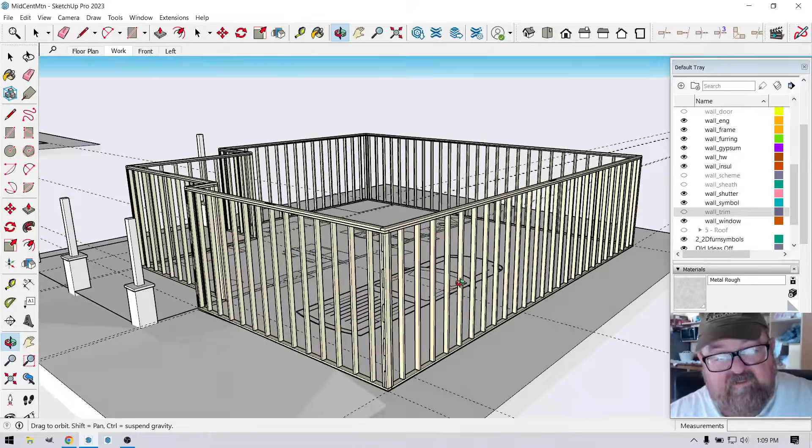This is my new tiny home. I'm going to replace my...

Let's just turn it back on. Turn all this back on. Well, let's go over here.

I'm getting ready to build my new little house, and this is fashioned after a mid-century modern house design that I love. The style I love. So let me turn all that back off. Let me get this.

Turn this stuff back off. Turn the roof off. Turn the sheathing off. Turn the cladding off. There we go, because what I want to do is just, and then turn the doors off. Turn the trim off. Alright, now we're cooking with gas.

What I was wanting to do is, I'm getting ready to build this thing, and I'm getting ready to pour the slab. In the next couple of weeks, actually, I need to get going on the material list for this thing. So the best way to do that is to just draw it.

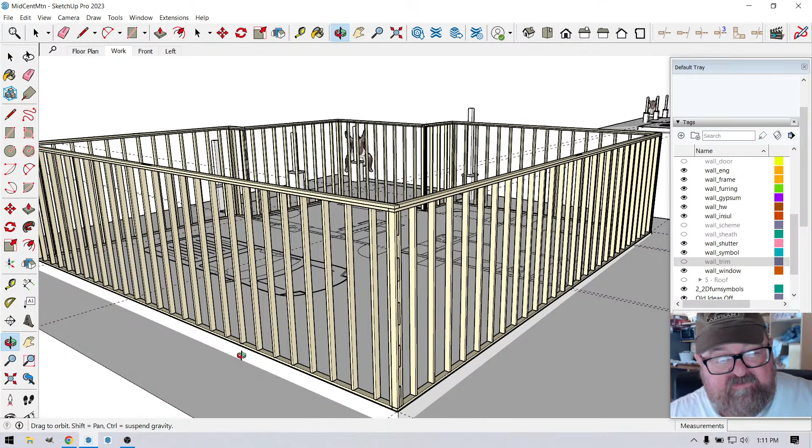Loud and clear now, great. Hey Gary, man, that's frustrating. I had so many wise things to say, and the sound was off.

I think I can convert this wall to a gable wall, a gable end wall. Let's see. Yeah, gable end, and what that allows you to do is put the pitch. Now, this is a mid-century modern cabin, so I've got to have a low pitch roof. So we'll just see what that looks like. That's a baby.

Is that the center? What is that? Oh, I see what happened. The one on the right was based on 109. Yeah, update.

What is going on? The dang skeeters are getting into my tiny cabin, and they're getting fried in the bug fryer. I've never had one last that long though.

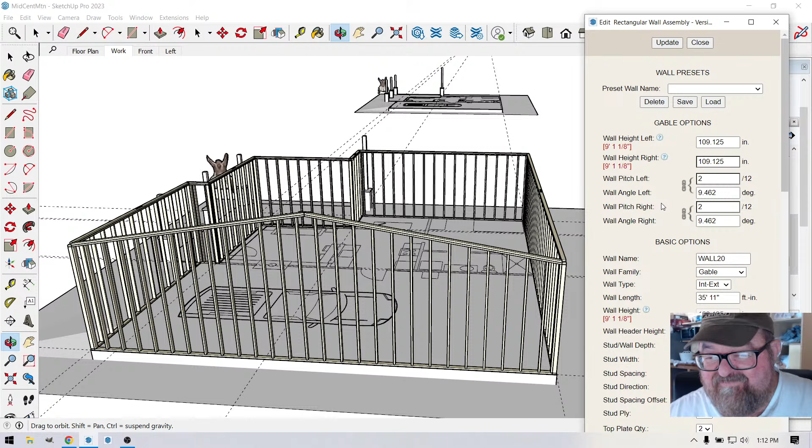It's kind of funny. Anyway, I wondered why the gable was not in the middle. What's that right there? Oh, that's the wall label. Let me turn these... ooh, it's starting to stink. Holy cow! Update. Let's close this for a second.

I want to turn these wall labels off. They kind of drive me crazy. But that's kind of handy, honestly, on this wall extension, to be able to convert the walls to a gable wall. Because you can see, if I turn on the roof...

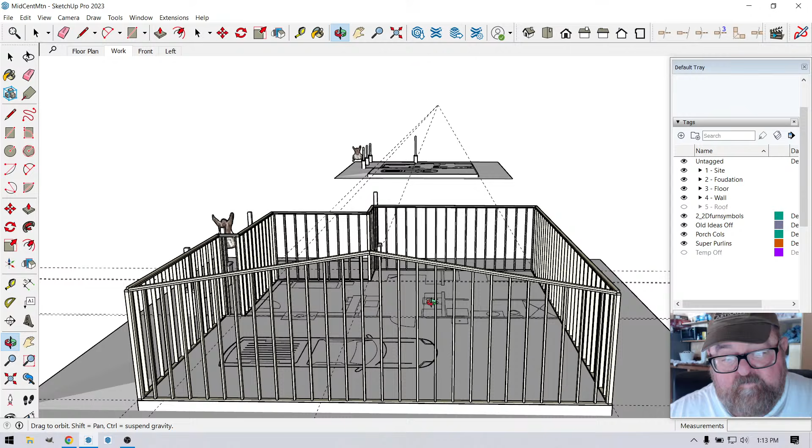It's kind of handy. Now, one thing I realized is, yeah, that, since we're getting into reality here, it's going to be kind of fun to see how this plays out. Because sometimes when I do it in schematic mode, I get kind of in a hurry. The interesting thing about this wall over here is that it is just...

If I put a line, it's just going to be a shed wall, right? No, it'll be a gable. Now how do I offset the... there's a question for Nathan. How do I offset the gable in that?

Let's just take this and edit it and see what happens. If we make it... wait a minute, there's a diagram. There's a gable wall.

Oh, I know what I do. I know what you do. You just make the... no, you don't. Let's see, how would you offset? I'm not sure I can offset the center. Let's see, maybe I'm just having a brain fart again.

It's, well, that was a big-ass bug. He's still frying over there. Let's see, look at it.

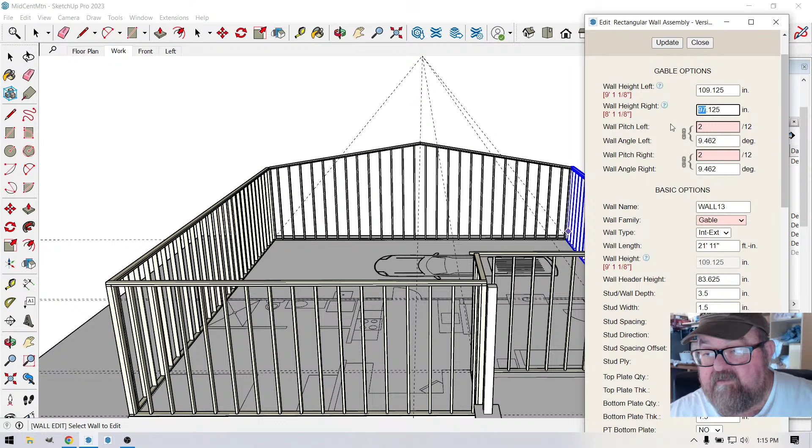So we want to turn this into a gable wall, a gable. And we want it to be a 2:12 pitch. Now I don't know how 109... this may be something I have to do by hand.

You see, oh man, that is not good. That's the first time that's ever happened during a live stream. Is this thing going? No. Turn that off. Well, we'll see what got saved. I hope a lot.

Alright, well, I don't think I lost... oh shoot, darn it, darn it, darn it. I remember I had to edit this wall to 5'2". I don't know what that was about. That hasn't happened in a long time.

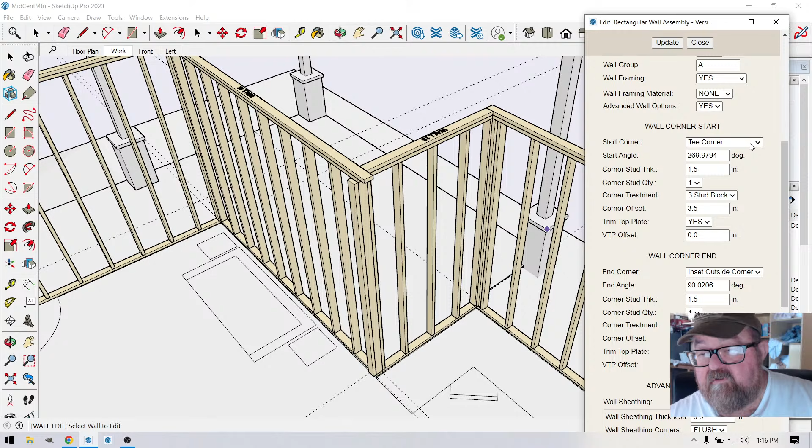And let's see, this is a... inside. Let's see, and be inside corner. And this one is... start. Inside corner is right. Is that what that means? Inside corner?

I had this fixed, and now this is the start right here. Start wall corner—it's an inside corner. That should be pretty straightforward. But the wall looks like it's too long. Why is this one wanting to be too long now? Alright, well, let's take 3.5 inches off this one and see what happens. Edit. Oh, 12 feet? Okay.

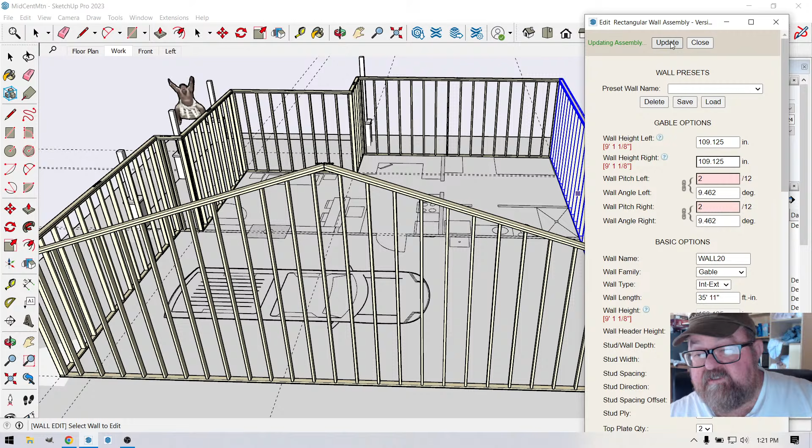Because your studs are 104 and 5/8, and then you add the 4.5 inches for your plates, and you get 109 and an eighth. In reality, it usually ends up being about a quarter because there's crud, there's matter between the plates and the studs, and so anyway, so that is correct.

That end is right. And let's turn on the roof for a second. This is the schematic roof. I'm going to actually draw rafters. I'm going to use the extension to draw rafters here in a second. I was kind of hoping to figure out this.

I don't think I can offset the center of the wall. Edit wall assembly. So it's a gable end, and it's going to be a 2/12. And this end is going to be at least this end is going to be 9 foot 2, or 9 foot, also 109. But I think what that's going to do is, yeah, it's not going to center.

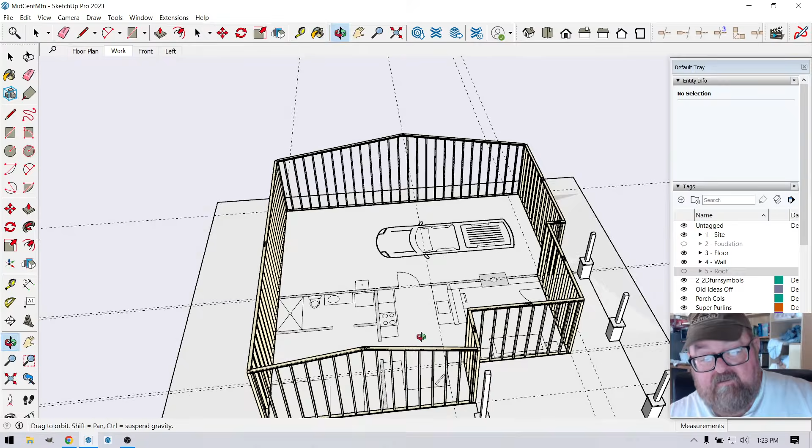I haven't run into this before. The center of the ridge is going to be, and I've been using his extensions for a long time, years and years. I haven't really ever ran into this need where, let me get rid of that extension line.

That right here is the center of the ridge. Let's see if I turn the roof back on, you'll see it's right there. And, oh, does that mean if I raise up this, let's see what happens if I raise this up, which it needs to be.

So this point right here, the wall needs to go up. If I can get to where I can see all this. Two foot 2 and 13/16. Will just be something hard to remember.

Edit gable wall. So on the right, 2 foot 2. Oh, it wants it in. Oh, that's the angle. I'm right here.

2 foot 2 would be. That would be 24. That would be 26 inches. So I'll probably just do this by, let's see, that would be 35, 135, and then 13/16 would have been, that's 1/8. So you might as well say it's 136. We'll just see how that looks.

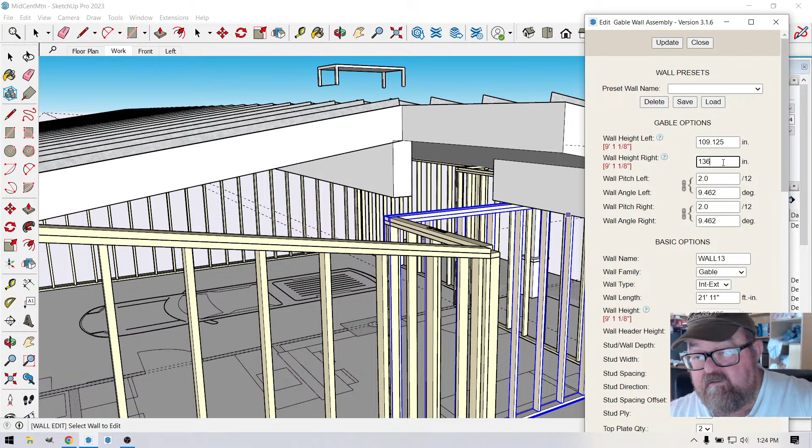Up. Well, what do you know? I'm a believer. Now let's turn the roof off and find out. I bet you, yeah, I bet you this is going to be 3.5 inches off because, yeah, because of where the wall ends. Yeah.

So I can fix that. I'm not going to worry about it now. What I'm mainly trying to do is I want to go around and look at how many, like, 10-foot studs I need, or I think these right here may have to be 12 footers. Yeah, so I've only got a few where 10 feet won't work. I got quite a few, don't I?

Let's see. Well, you probably have to go all the way down to here, won't you? Yeah. Holy cow. Oh, that's 10 foot. 9'6", so 10 footer works. 10 footer works. So anyway, I went to buy some 12 footers, and that was why I'm doing this.

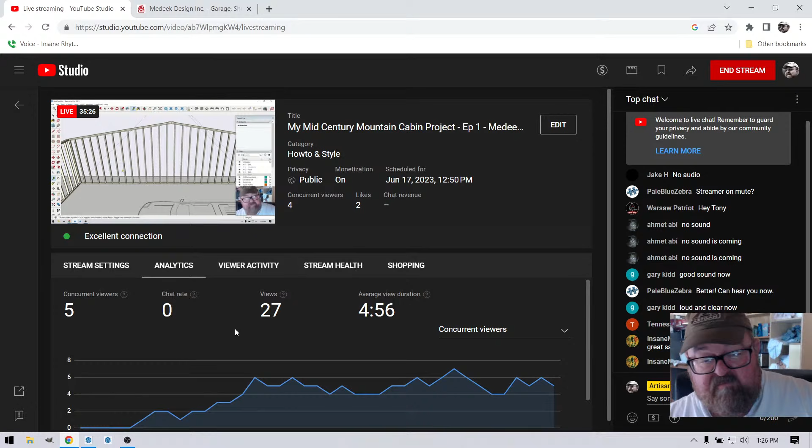But I think what I want to do is do something fun, like put the roof on it, because I'm excited to see how, because that'll tell me where these other walls extend up to. Y'all are making me want to save my work every now and then, though, 'cause after that bug splat, I get kind of nervous. So the other thing I'm trying to figure out is why this.

Alright, well, I'm not going to worry about that. I'm just going to start the roof. Let's see, I want to do the truss, do roof rafters. Yep, gable roof. Okay, and we're going to start here. And I'm just going to move it back after I get it.

And then we're going to go all the way over here, because I can just make it longer. And we're going to make the pitch a 2-12. Huh, it didn't want to go long.

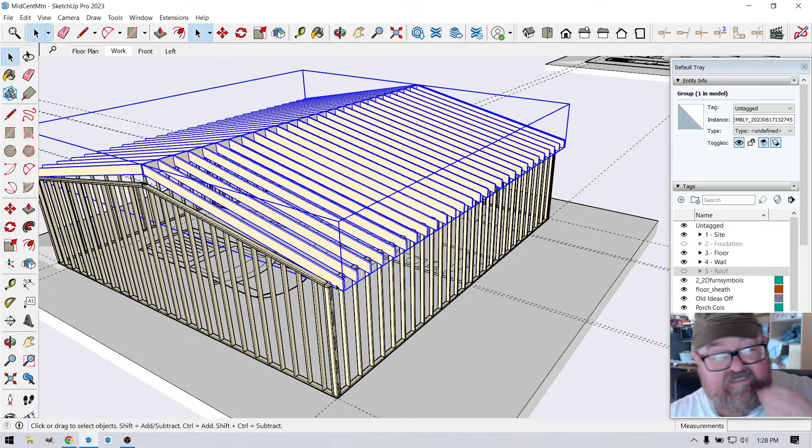Yeah, let's just leave them like that for now. Let's see, I do want to put the right overhang on, though. Do I need 2x10s? Yeah, I need 2x10s for my insulation. Let's go back and put a 2-foot overhang,

because 12-inch overhangs are girly. And we'll put 24 inches here. And then the roof length, where's the roof length, the overall span, here it is. We want to go

That's 375, is that 3/8, right? 3 divided by 8, yeah, that's 3/8. So what we want to do is 36. That's in inches. Building length? Oh, feet, building length.

I think what would be easier for me mentally is just to, since that's in feet, is just come over here and run myself a little line. I think that gable wall is keeping the plate from extending out, so I don't have a reference there. But this will fix that.

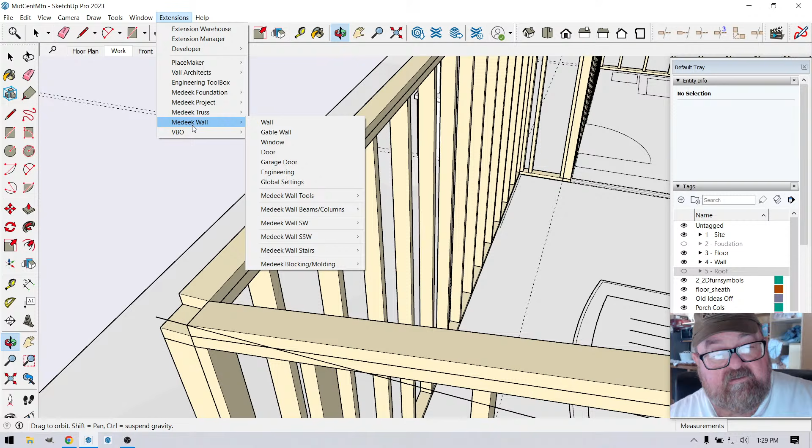If I can just go back. Truss, roof rafters, gable. Now I've got something. I won't have to worry about exactly how long the roof is. I mean, I actually kind of know it's 36 feet 8 inches. So I don't know why I didn't just.

Right, so 9 1/4. Oh, let's just go ahead and fix our overhangs while we're here. 24, 24. Okay. Like 16-inch centers.

Okay, there we go. And then I gotta put 24 inches overhang on the end. Update. That was spacing. Shoot, 16. I guess I gotta do advanced options just to get the, yeah.

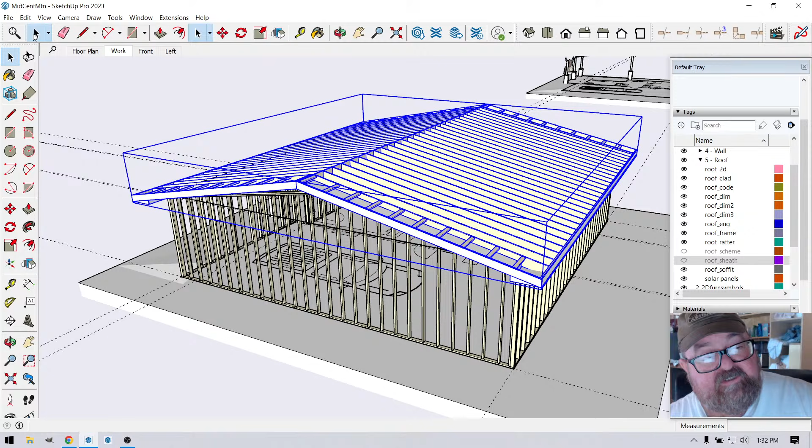Now I hope I can change this to a 2-12 because I'm going to be kind of mad if I can't. I don't want anybody telling me I can't have a 2-12 pitch because I know I can. There we go. My solar panels popped up all of a sudden. That's funny, they're not high enough though, are they?

I'm going to turn them off. What is that? They should be, oh, they're down here for now. Alright, I wonder if we can, probably low slope, let's see, Southern Pine span tables.

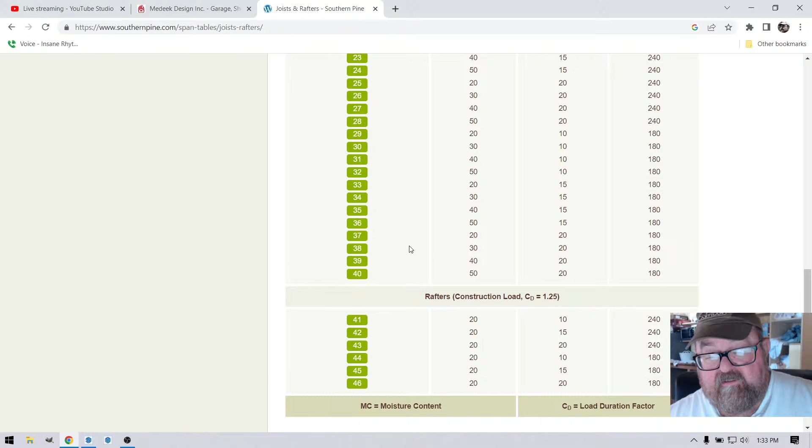Go to rafters. Let's go to 2x10, have a minimum. And what's our span? Should be 18 feet. What is this, 36 feet? Yeah, so 18 feet is our span.

And if we go to 2x10s, we can go, shoot. Not, I can't go to 24 on 24-inch centers. You can only go, looks like 16 feet. I could go 19.2, that might be kind of cool.

I've used that, I used that spacing before. It's kind of cool, it's 19.2. Well, we'll decide on that when I get closer. But I don't think, well, it's a low slope roof too. I think I'll probably leave it at 16.

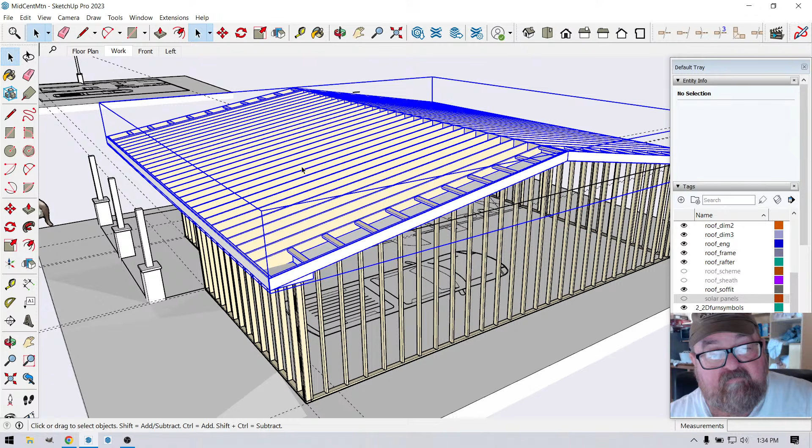Try to figure out a way to save money, man. Can't blame me for that. Now let's turn off this soffit. First, that soffit is going to be a sloping soffit.

So down here we can go to, I don't know, some of these things are in different places. Soffit cut. Where is it? Fascia. Oh, box. Here it is, angled. Update. There we go.

Yeah, that's how we get our rafter cut, is we say it's angled. And what that does is it makes it the same as the, yeah, that works. And then I can turn it off, and then it'll give us an idea of what it's going to look like, off of it without the, it'll be our rafter, the way our tails are cut.

Now this is kind of a pain, but I've done it before. It's not that bad. Once you just kind of get set up, you've got to get a rafter pattern. This seat cut should be 3.5 inches on that.

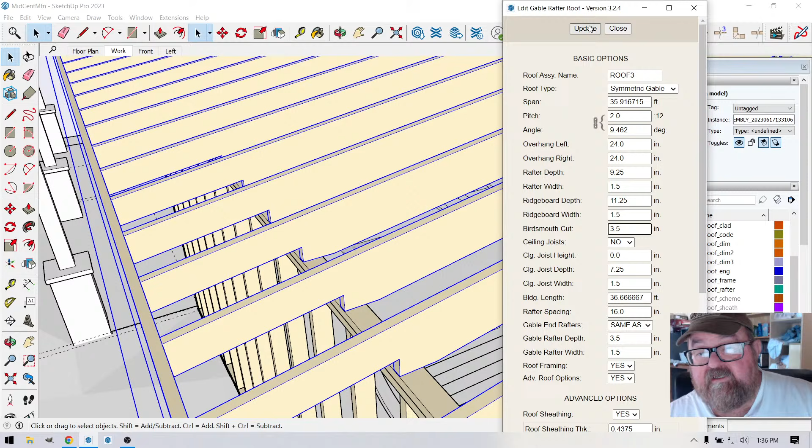Looks like it's set to a 2x6 wall. Where is it? Yeah, bird's mouth cut should be 3.5. Update. There we go.

That matters because if you're putting a ceiling material on, you want that slope to end at the wall. You don't want it to end back here somewhere.

What I'm going to have too is I'm actually going to do a beam, a ridge beam. Let's see, where is it? Scheme. It'll be this thing right here.

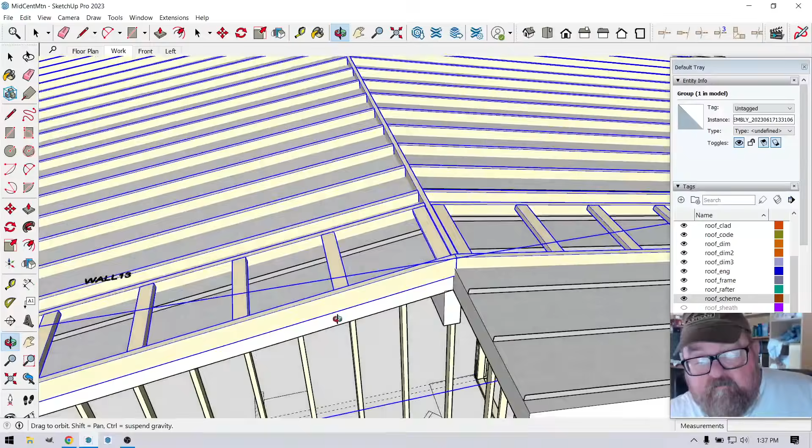I won't really need that. Ridge board there. The rafters will just butt into each other. So that's pretty cool.

What I was trying to do is figure out where, like where these walls, how tall these walls needed to be. Because I know what Paco's going to say, my framer. He's going to be like, that's too much trouble. I just want to.

So technically, if these, well, let's see too. These rafters extend out to here. Let's see maybe in their comments.

Everybody gave up on me when my computer crashed. Speaking of that, I better save what I got here. But these rafters out here will extend.

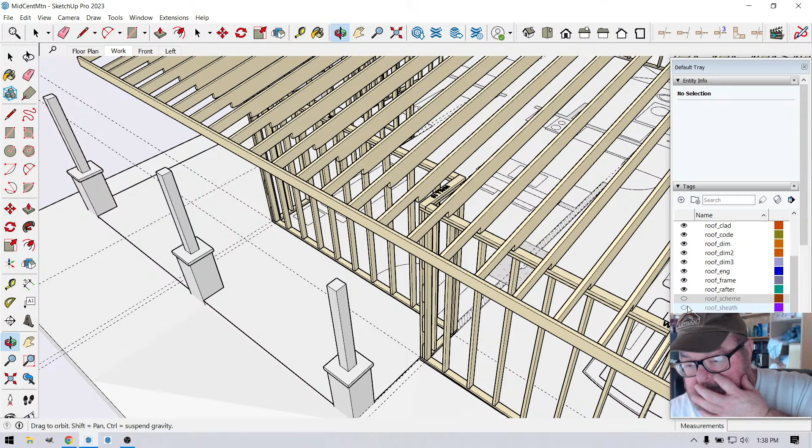What reminded me was these were not sitting on anything. They will extend out to the beam, the porch beam, which is going to be kind of cool. I need to separate the beam. I want to put this.

Oh yeah, and this extends out too. So at some point I'm going to have to explode my roof assembly, which I'm not looking forward to. But anyway, I want to separate these beams out.

I'm just going to put them in an untagged layer for right now. And I can turn the scheme off. And then I'll probably have to go in and just...

Let me fix these barge hangers before I do that, before I explode it. What am I doing here? Edit rafters.

What I want to do is make them structural. And then that's correct.

Outlookers at peak. No, they don't need to be that close together either. They can be like, I think Paco puts them at 48 inches on center.

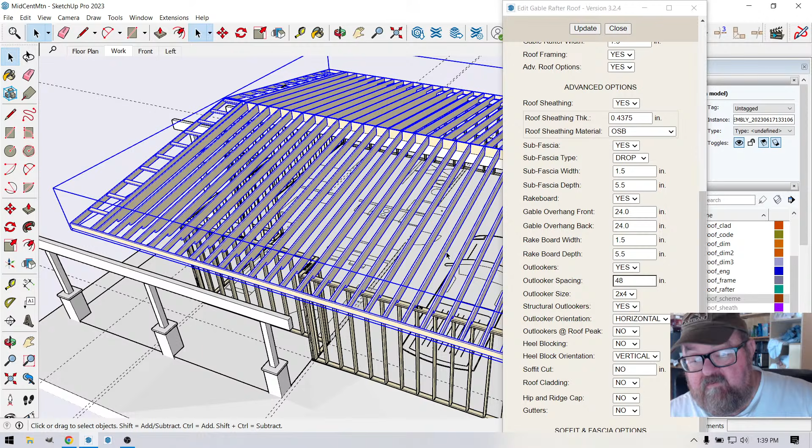Okay. I forgot what that said. Custom. This needs to say custom. Update. There we go.

And then I think I'm just going to go ahead and explode it because why wouldn't I do that? Why am I worried about? I'm not that worried. So yeah, I can always recreate it.

So I'm just going to go ahead and explode it because there's too much custom stuff going on here. So what I want to do is explode this where now I can, is that an edit component?

Yeah. So what I can do now though, see, is I can take, how many are these rafters? Well, shoot.

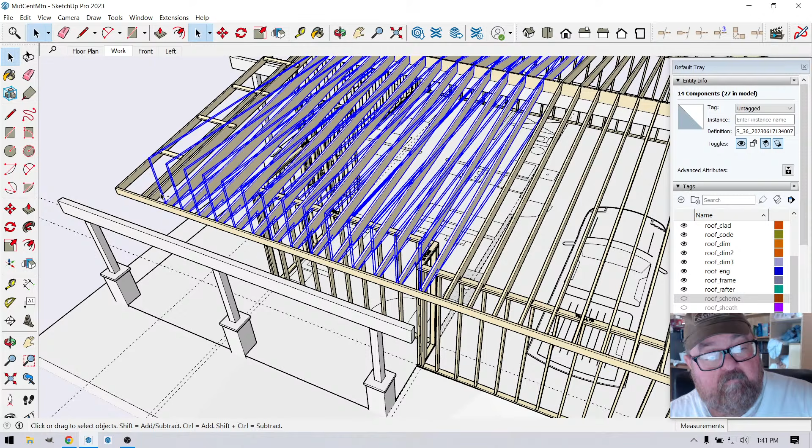I can take this one and make these unique, and what that'll do is, oops, I forgot he makes these in bays.

I need to get to where I can grab these quicker.

Oh, it's a group. See, I disagree with the way he does that, to be honest with you. These should be components by themselves. They shouldn't just be groups.

So what I'm going to have to do is make one of these a component, and I have to get rid of the rest of them.

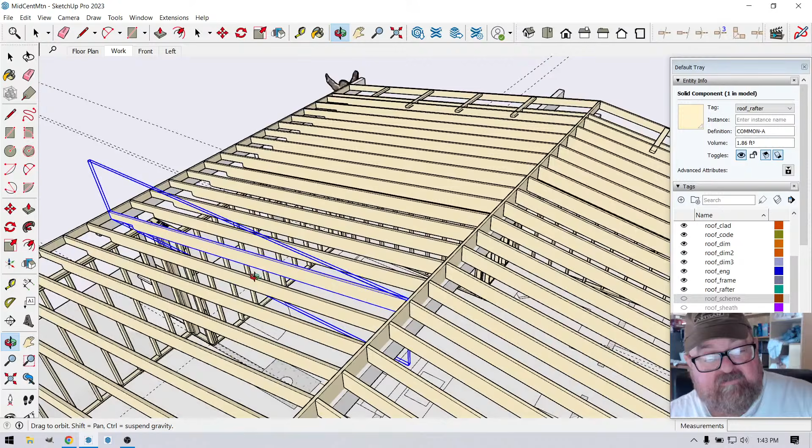These rafters should all be just a component. On a gable roof like this, he should pick one rafter and make it a component because all the rafters are common. But what he did was he made a bay of rafters a component, and so now I got to get rid of these.

Is that my component? Yeah. Alright, so now what I need to do is have this thing extend out to the beam.

And I'm just going to use this. This will tell me if I've got my beam at the right height or not. No, that's good. I can raise it up though. That's good. Which I was wanting to do.

Is it on the line? Yep. Not good. It's probably because the only thing I'm seeing here though is that this bird's mouth is kind of shallow. I may need to lower it back. I may need to leave it where it is and just lower this whole roof thing down.

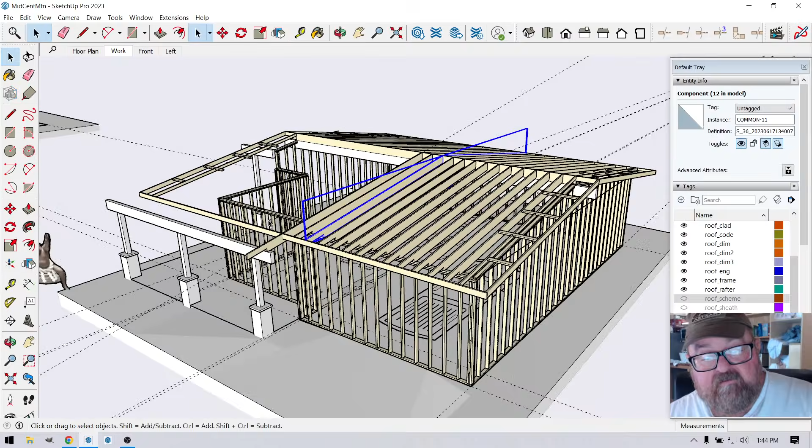Yeah, I don't think I'm gonna change that.

What is this tagged? If I say select all the same tag, oh good Lord, how does that work? Oh, it's untagged. Okay.

That doesn't make any sense. This should be, yeah.

Trying to think of the easiest way to grab all this. And just unselect this. What I want to do is lower this.

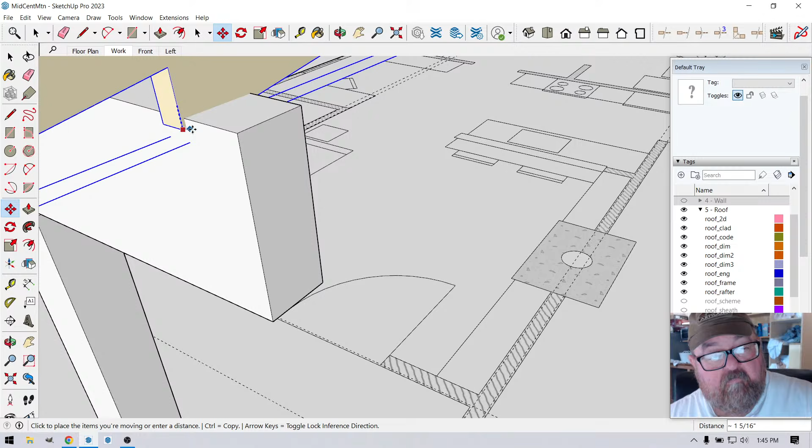To there, and see how much it gets my birdsmouth fixed. And so how did that happen? I scoot the wall for some reason.

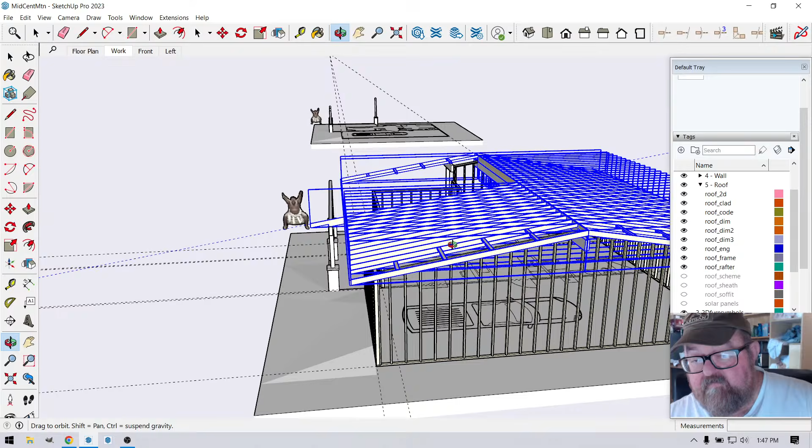That's weird. I'm wondering why this plumb cut here is not right. I wonder if my wall is straight. No, looks straight to me. Except that this end.

Oh look, darn it! What is going on? Somehow my wall is not straight.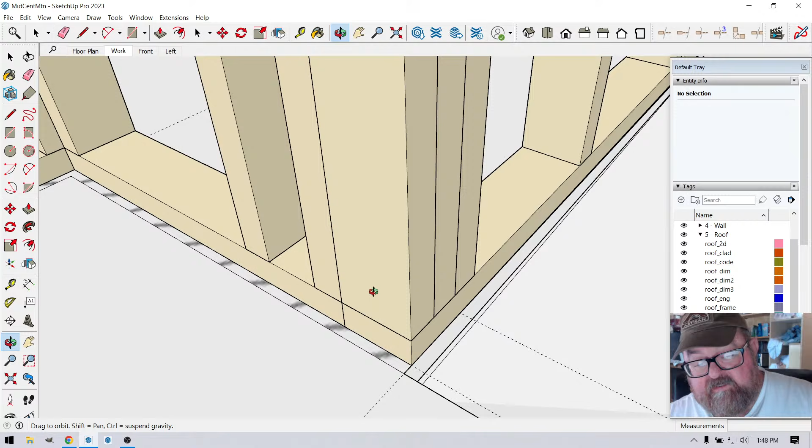Let's get rid of this one. So that is the outside of the wall. And something, this wall is not where it's supposed to be. Well, looks like I have some issues I need to fix. Anyway, it's funny when you start getting into the actual framing, this kind of stuff will pop its head up.

But what I'll do is I wonder if I move the wall around, what if I rotate it, what would it do? Would it act right? If I take this. And I wonder why. I wonder if I regenerate this wall now, if it'll...

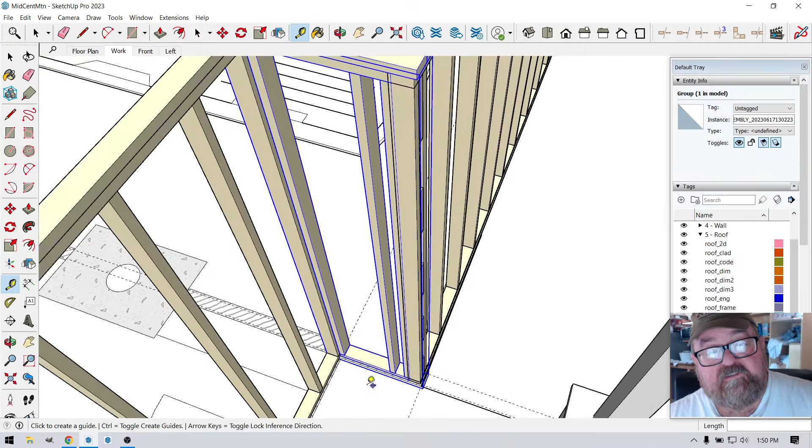This wall is supposed to be, this one is supposed to be 2 feet long. Let's see what it says. 24.5. Yep. Well, at least that was easy to fix. I was afraid it was going to be something weird. Yeah, that fixed it. Except that, why is that off a little? That's weird.

What I was worried about was that my plan was wacko. But I think when I was just pulling the walls around, yeah, when I was pulling the walls around, I must have messed that up.

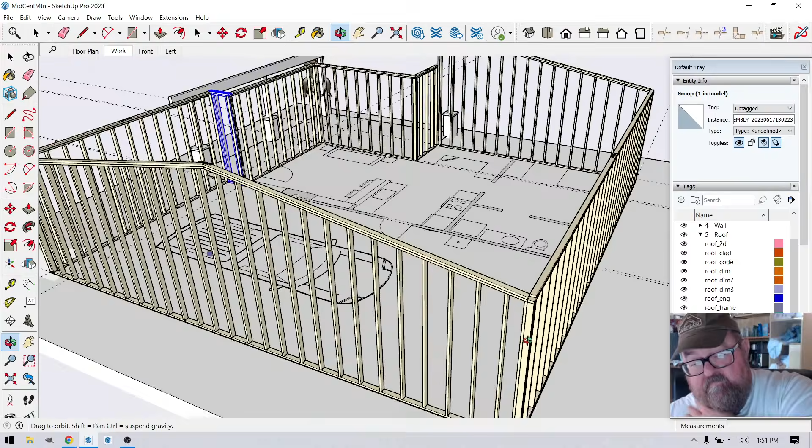So good. Now this wall, what's funny is this little short wall actually goes all the way through, and it is actually just like this wall. Yeah, what about that? I could literally copy this wall over there, but I don't want to do that because when you copy these walls that you created with the extension, they don't like it. That's my experience anyway. As a matter of fact, I'm gonna hit the save button here.

Let's see. If I edit this wall, how long is it? Not regen, I mean to say edit. It is 35 feet 11, which is correct. So I should theoretically be able to turn this one into edit wall assembly. 35 feet 11. Where did it go? 35 feet 11 inches. And I should be able to turn it into a gable...

And make this 109. Make this 2. And update. And boom. So that means I should be able to move it back this way. How many feet? 34 feet.

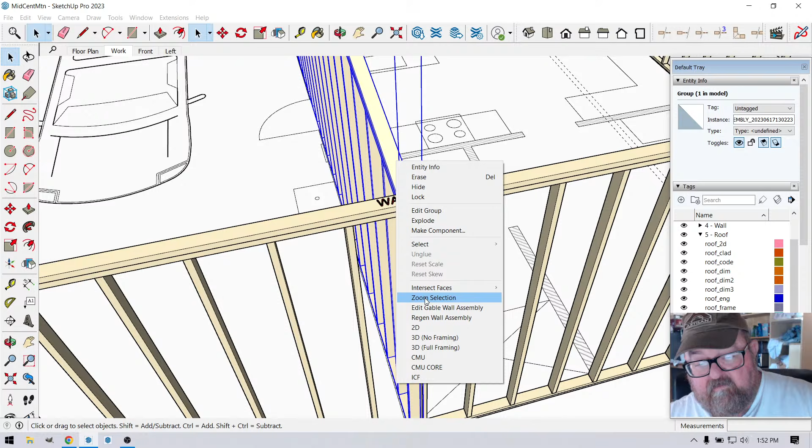Should be right there, shouldn't it? Now if I regenerate this wall, it should act right. What did it do? What did it do? It's not recognizing it, is it?

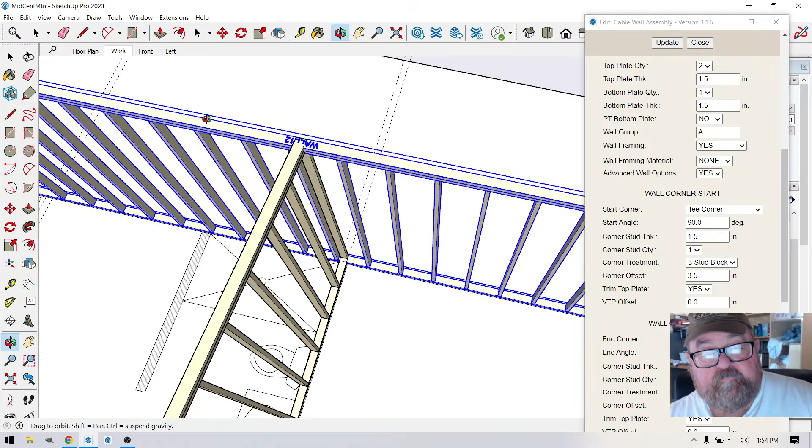Let's see what this says. Edit wall. Let's see, the start condition would be, oh, a Tee corner. I saw something change. It's probably just weird because this is a gable wall type and it's not wanting to play perfectly right. But the interesting thing about this is that's going to give me this wall height right here.

Yeah, so that means this wall height is going to be this many inches, 3 7/16. And that should be easy because Paco can just, what I can do is I can edit this, and I wonder if I just add... No, I can't just add plates because that'll just make the stud shorter. What I'll have to do is just make the wall taller.

In real life, what he'll do is he'll just probably stack up two more 2x4s just to keep from having to pre-cut the studs at a different length to cut. That way we could even add a bottom plate and a top plate just to add 3 inches, and then you could put OSB, 3 7/16. You could rip down some OSB and put it between the two top plates, and that would make it just right. But the height's going to be 112, and let's see, that would be 5/8. That would be 625.

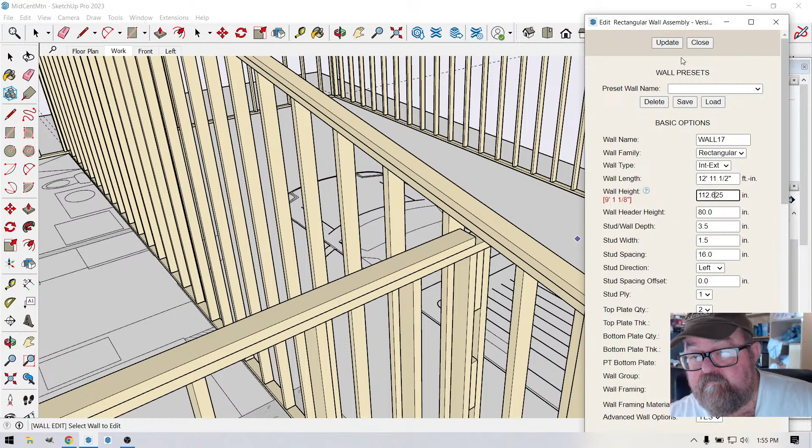There we go. Alright, so we're getting somewhere now.

Mainly, I'm not trying to make this perfect. I would like for it to be perfect, but I'm mainly trying to figure out my stud material because I know I've got all these custom walls, and I do want these to be right. I think Paco's going to try to talk me into just building these out of all 9-foot studs, and he might do it. But the thing about it is, I don't like that.

I'm not going to like how if you did that, the wall you'd build would be this little short triangular wall, and then you'd have a hinge condition in the wall right there. I'd rather the studs just come all the way up.

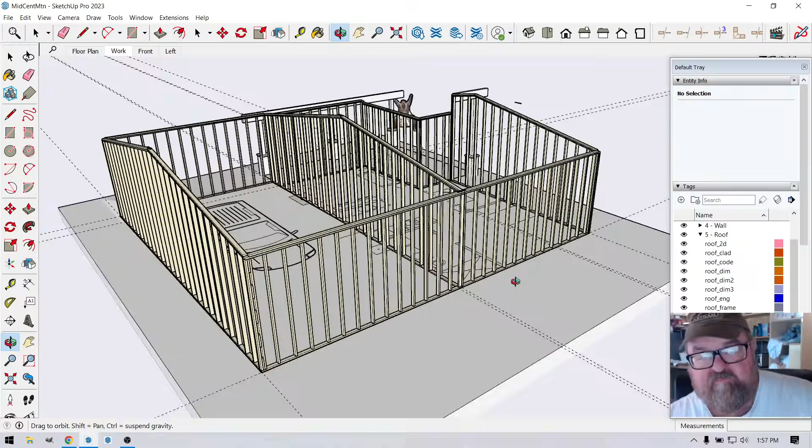So the reason I'm doing this is because I'm going to get this so perfect that I can just give him the length of each of these studs. And it might be that me and Barrett just go out and cut the studs the day before and stack them up in order or something. I don't want to make my good friend Paco mad at me. Paco's good.

He's good. Now this wall would be this height right here. This wall would go to there, so we'd have to add 26 7/8 to this wall.

Let's see if we can do the math really quick on that one. Wall height, that would be 35. And what did I say? Oh, I said before it was 36. Yeah, 136.

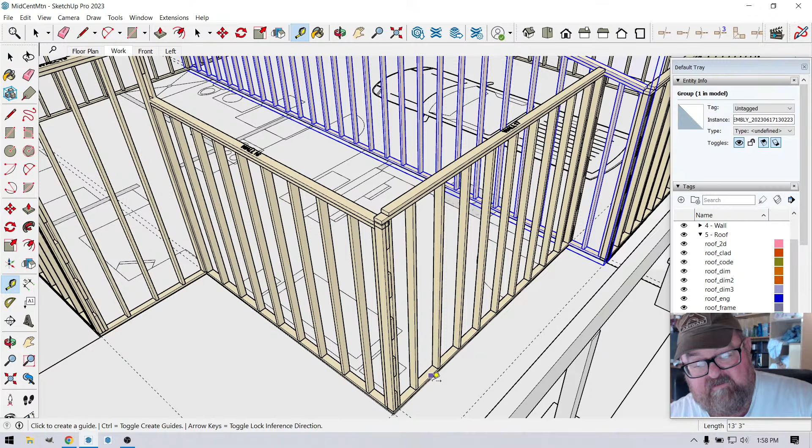By the time you add... that looks good. And then this wall would turn into a shed. What was the height of this wall? It's not like this is a 10,000 square foot house where you've got to worry about building a bunch of custom walls.

9'4" and 5/8. Let's just see what that is. That would be 113.625. Is that what it was? 112.625. 9'4" is 108 and 4, yeah, 112.625.

So then what you do is we could convert this to a shed wall. Shed, and we can go 212, and the lower wall height is that 112, and left is... I've got to change the direction to right. There we go. I forgot what this was. 112.625.

You see though, it's kind of cool because now I can just go around and see how many 12-foot 2x4s I've got to have, how many 10-foot 2x4s, how many 9-foot studs. So what's funny is the only 9-foot studs, well, I can get by with these, that wall, and this wall back here. But the rest are going to be either 10 or 12 foot.

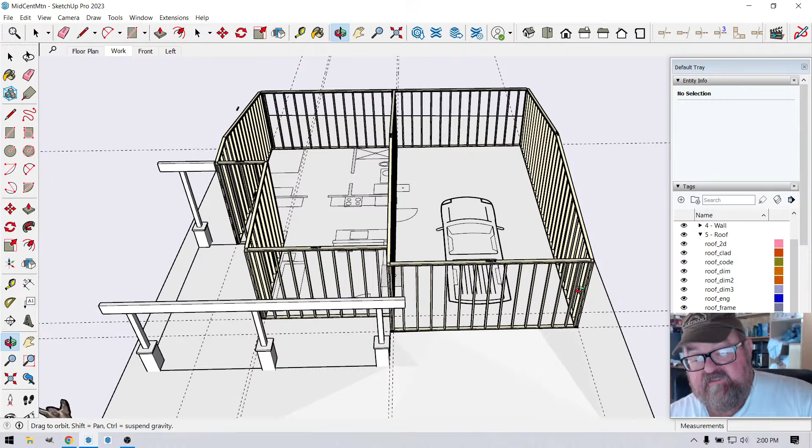I really don't want to make this lower wall 8-foot back here. Oh, I know why, because I want a... let's do that. I want to put an 8-foot garage door in here. So let's do a garage door.

And we shall do it, width is, that's right, 120 by 96. I like 8-foot tall doors. 96. And the garage header is going to be 2 9¼ LVLs.

Where am I? My eyes are going bad on me. 1¾ right here, there we go. Update. And let's see what that does. We'll have two trimmers on each side.

Now let's see if I can find the center of the... there we go. See how that worked out up here. Yeah, what we'll do is we'll raise that header up. That's odd.

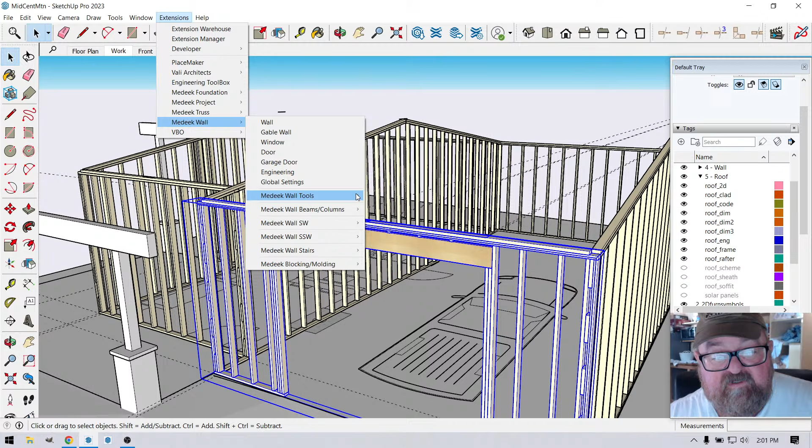What did it make this? Should be 8'1", so let's go fix that to begin with. Let's see here. Wall, edit opening, rough opening 1. There we go, that should pretty much get it.

What we'll do is we'll just raise it up to that top, the bottom of the top plate. That's how we would normally frame that. And since you've got LVLs up here, it'll easily span that 10 feet.

Yeah, and what I normally do is, the reason I add that inch is because it doesn't take away from your garage door height. That gives you an inch. Then I use this 1-inch thick Hardie to make the jamb, and that makes the clear opening 10 feet. You don't lose anything. So I always add an inch to my garage door openings.

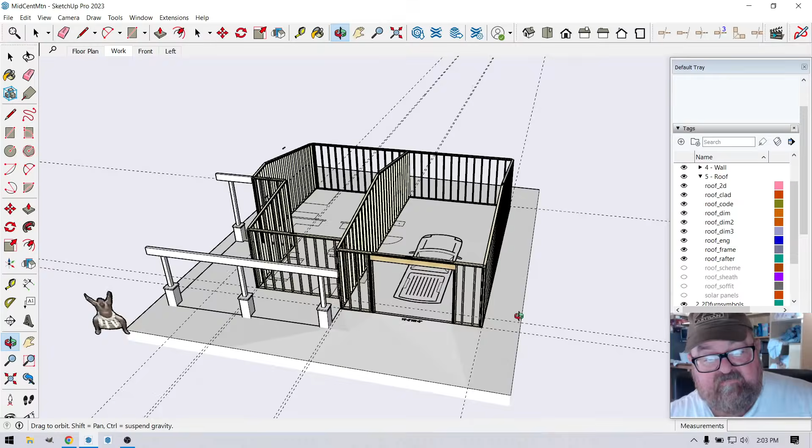Let's see, and I add 2 to the sides. Edit, so this should be 10'2", 122. There we go. And then on each side of that, I'm going to have these windows. Let's see. Let's turn on the wall scheme for a second.

What have I got them as? 22 feet by 6 feet. Yeah, 2 feet by 6 feet.

Turn that back off, and let's see what that's going to look like. Wall, window, 24 by 72. I'll have to adjust now - what I'll do is this header will end up going all the way across. The garage door header will. As a matter of fact, I'll probably fix that.

And the door height is 97. I mean, the header height is going to be 97. Update.

Let's just see if we can just slide it in there the way it's supposed to go. I gotta get it over here. Just gonna guess it first.

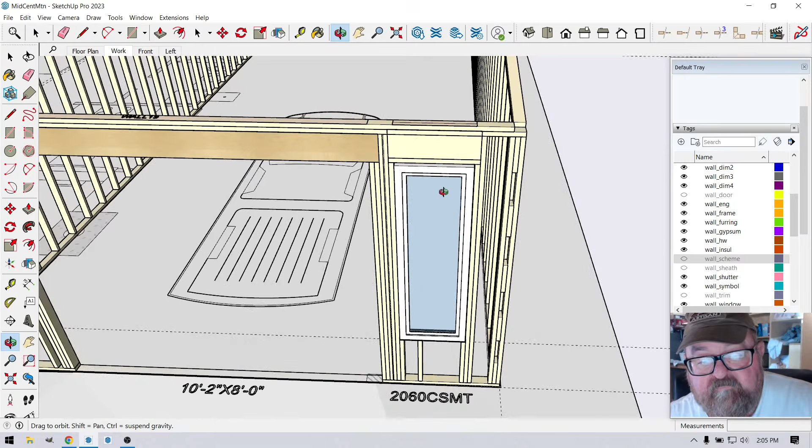What I'm gonna do though is I'm gonna have it to where the jack will go right beside the king stud. So where are we? We can move this over an inch and a half.

When you do that, you grab this, you go to move opening, do that, and go 1.5. Did it move? Don't think so. You gotta go minus 1.5 to move it the other way. I forgot which way I had to go. Grab it and go minus 1.5. Yeah.

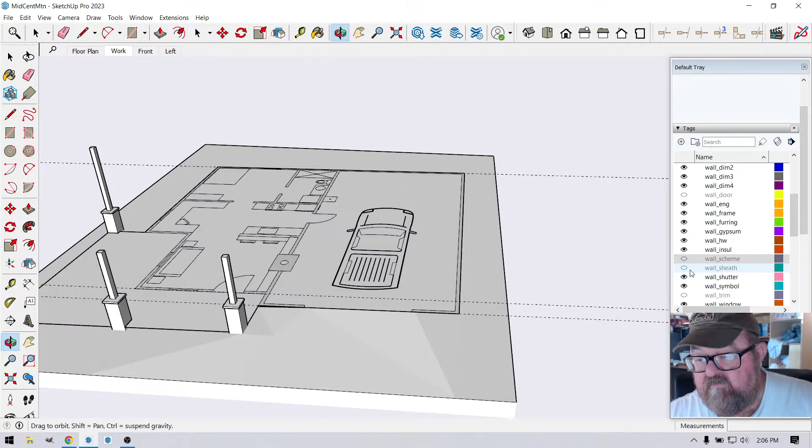I think that's how - because what I want to do, I'm trying to get to where I can just do this thing, where I just have like one piece of trim, and if I turn on the door, you can see I just want to have one piece of trim that goes all the way down like that. So I'm going to put the window beside the framing. Like I said, I'll put the jack.

UFO Las Vegas update, the plot thickens. Why am I getting a text about... who is that from? I don't even know. Somebody got my number, man.

Anyway, you can see that's kind of the look I'll have there, and I'm not sure if I can get it, but what I want to do here is turn off the scheme. I just want to see the framing for right now, so I'm going to turn that off. I'm going to turn the door off, and I'm going to turn the windows off, because what will happen is this, and I know how I can fix this.

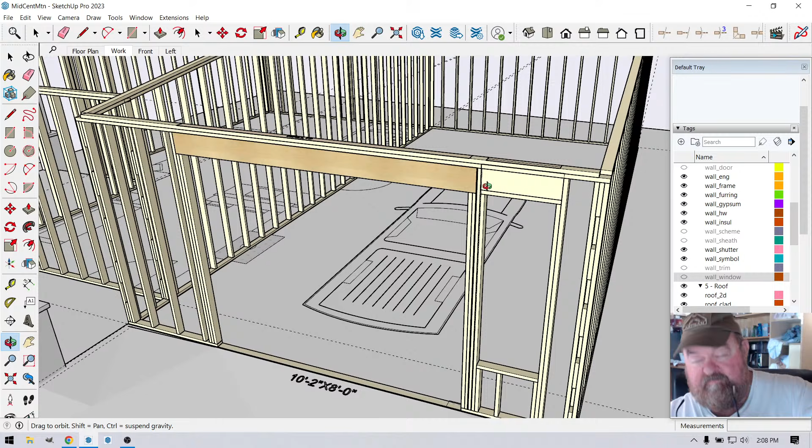This got me interested. Is that you, Warsaw? Is that you texting me? That's funny. I'm doing a live stream, boy.

So one thing you can do is you can make this door have portal framing. And let's see, I think if I turn on the advanced - where's portal framing? There it is, portal framing, yes. And then let's update that. And then you can tell it how far

to go. Like I can say go 20, what would that be? Let's see, I gotta go 20, at least 29, maybe 32 inches, because I got to get past the framing. See, did I get lucky?

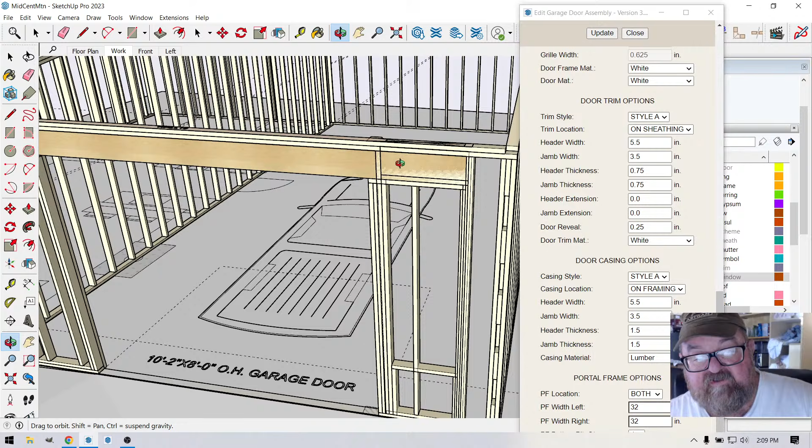Yeah, but in any event, well, okay, that won't work because it's gonna put framing into my window opening. But in real life, I'm not worried about this much detail on the garage door header. All I'm trying to do is get it close enough where I can figure my framing on all that, and just have a visual aid when I'm starting to figure my headers

and stuff. So it's pretty cool. Pretty cool, but I'll be able to sit out here on my porch. The way this is going to work is we go back over here and we close this out. We turn the walls back on. Roof scheme - well, not roof, sorry, wall scheme.

I'll be able to sit right here in my little work area and look out the window and look for UFOs.

No, I want to be - I got a few little raccoons who hang around. I actually made the mistake of starting to give them apples at night, kind of hoping I'm wanting to get them to where they'll come around during the day, but they don't like that. They like hiding out during the day.

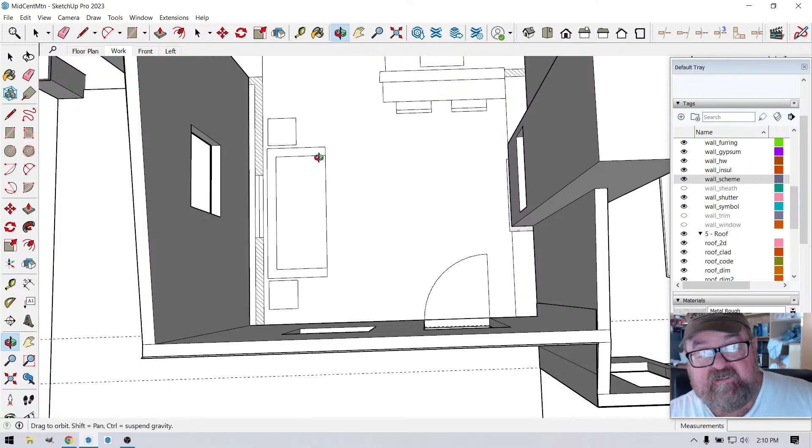But anyway, the way this is going to work is you'll come in the door. There'll be a living area here, and it just occurred to me I need to fix this. The plan looks like I wanted to make the interior living area bigger. You know, I made that 4'6" instead of 5 feet.

So, I mean, the living area is not that important to me, but if I ever want to sell this place, I gotta have at least one real bedroom and a decent little U-shaped kitchen. And of course the door to the shop will go in right there, and the fireplace is going to be cool. It's going to be to where I can load it from the shop and run a fire in there. Most likely the truck won't be sitting there when that happens, but it'll have the screen on it. But I'm actually going to make this - I'm going to pour.

It's not going to be like this necessarily. I'm going to have a box, let's just pull this out. That's not really what I wanted to do. I didn't want that to be part of that. So I want this to come out here for a second. Let's go 40 feet, that way I can send it back.

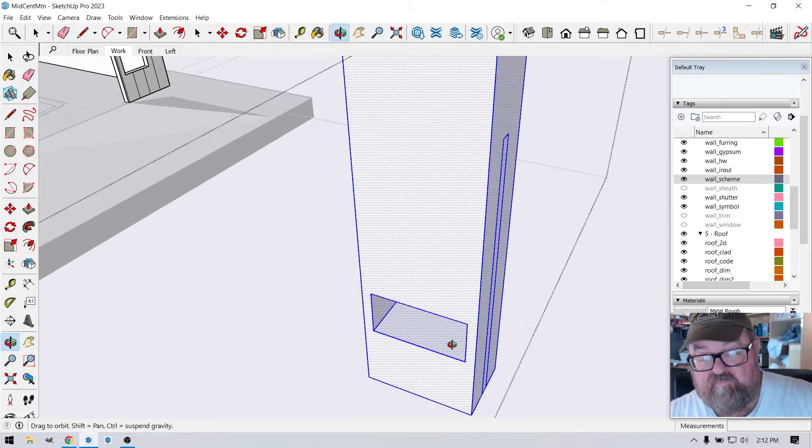And so I'm going to pour this out of concrete. This is 4 inches. Yeah, I'm going to make this 4 inches. This is going to be awesome.

I've already started thinking about how to build this, and I hadn't even started the house yet. I miss a fireplace, especially this tiny shack. I mean, it's easy to keep warm, but it's just the atmosphere you get. I feel like, you know, I don't really need a fireplace.

But why is that? What's that thing right there? Oh well, I ain't gonna worry about it, unless it gets them on. Oh, that's what it was. Some goofy part of that wall. And then this will be 4 inches.

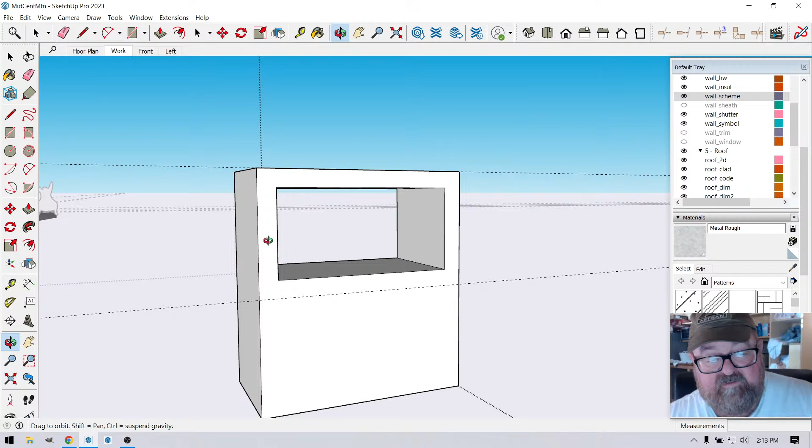I've already researched how to do this too. There's a termination piece. That's basically what it is, and this will have in the middle a 12-inch opening. 10 or 12, I think it depends on what size, I think I can get by. Ooh, that should be 5. Yeah.

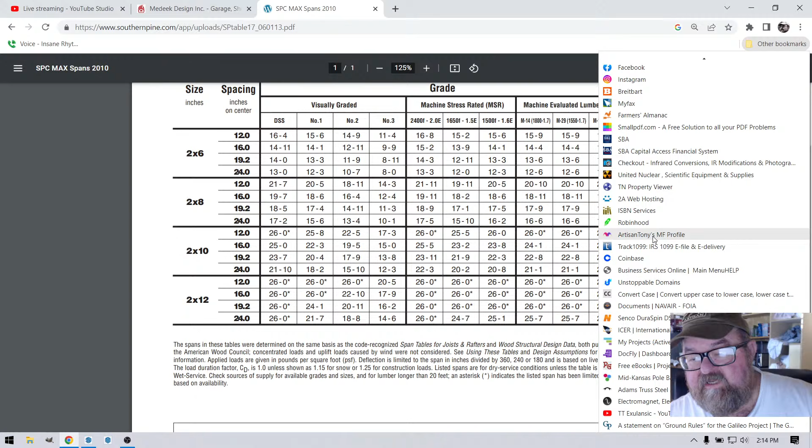Yeah, but I've already researched this. I can buy it, it's a termination piece. What did I do with that? I had it somewhere. I thought I saved a link. Man, what was it called? It was called a double wall flue support base or something like that.

Of course, they're not going to show. I won't be able to find it now. But anyway, it's a piece you can convert your masonry fireplace into something that will accept a double wall flue. So it's an adapter. I don't know, you're not going to believe me unless I find it. It's going to be the last picture on the internet. Anyway, I hate that when I can't find exactly.

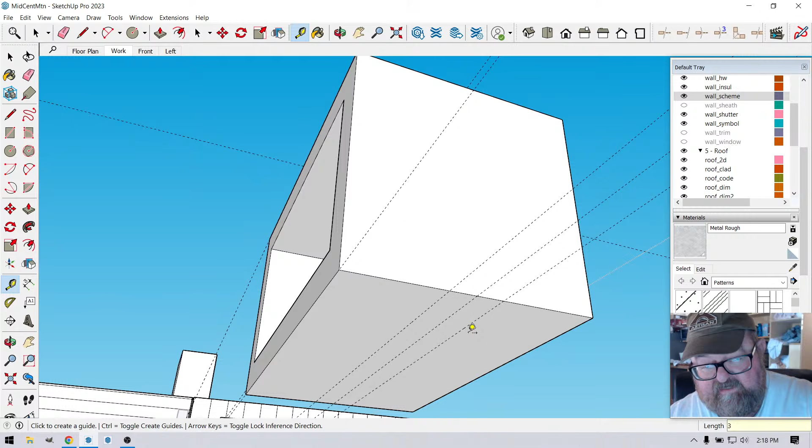But then I can't decide whether I'm going to pour this in there to begin with, but it's going to be pretty heavy, so what I probably need is like a 6-inch, probably maybe not that wide. Yeah, I don't think I have to go that wide, but probably, what is this, 24 inches or something. It'll have a little wall to support it like that, and then the walls around it will be built around it, so it'll be pretty cool. Pretty sure it's going to be pretty cool.

And if I just make this a group now, my stomach's growling for some reason. I had an apple for lunch.

Boy, I'm going to block you. Oh, that's Ray. Can you check next week on that window? Yes.

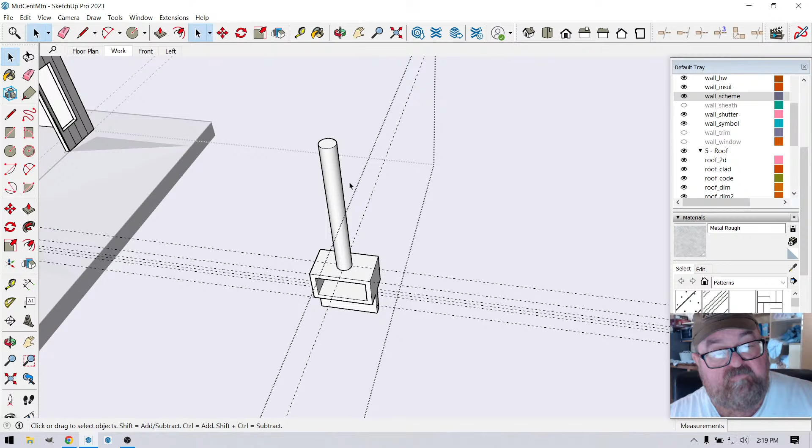So then this will be - this will end up being a little bigger, and then it'll come up, like that. So then if we just make a group out of all this, make a group, and we make it go back 40 feet.

Well, let's see, let's get rid of this other one first. Let's see, let's get rid of this one. Well, don't want to get rid of it because I'm gonna have a box coming out of the top because I want that look. So let's just cut it off right here for right now, and we'll get rid of it.

What I should have done was left the wall there. Should do this and then do that. Because the wall will have to be built, I'll have to come up with a way to do it.

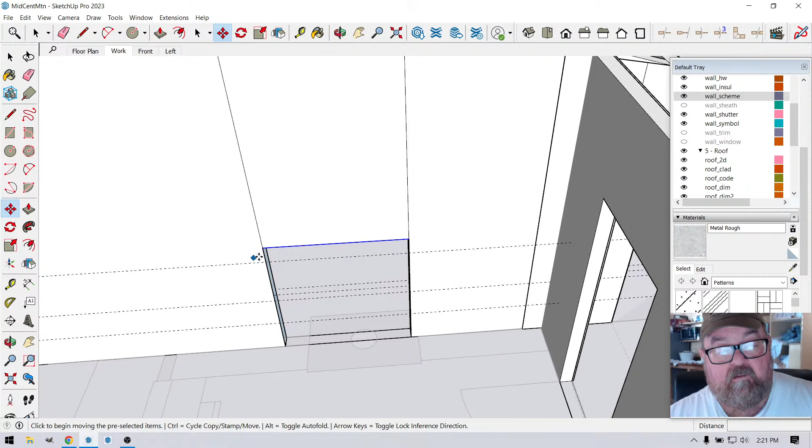Let's see. Let's just bring this up here for right now and get rid of this. Oh, it doesn't matter. And then take this and go back 40. That's why I move it up a specific amount, so I can just move it back. See?

And what I'll have to do is figure out a way. This is a detail I have to work out. I'll either put the flue on one side of the room or the other, or I'll just go ahead and put it in the middle and come up with a detail where the wall just looks like it goes to the pipe or something like that. See, but isn't that going to be cool? Then this will be...

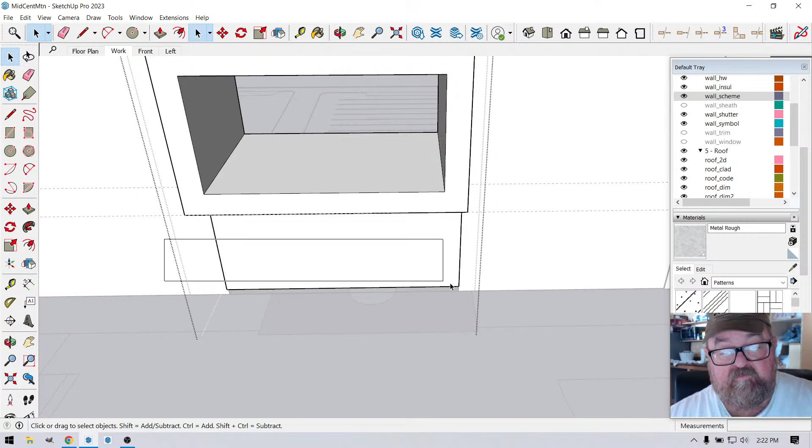Down here. Oh look, I didn't double click enough. And this will be, let's see, concrete. It's going to be awesome, man.

This line actually won't be here. And my laptop's about to start on fire. It's so hot.

I need to figure out a way to get it heat sinked better.

Like that. And if we turn the roof back on, turn the roof back on. I'll have to work out the roof detail because it'll have...

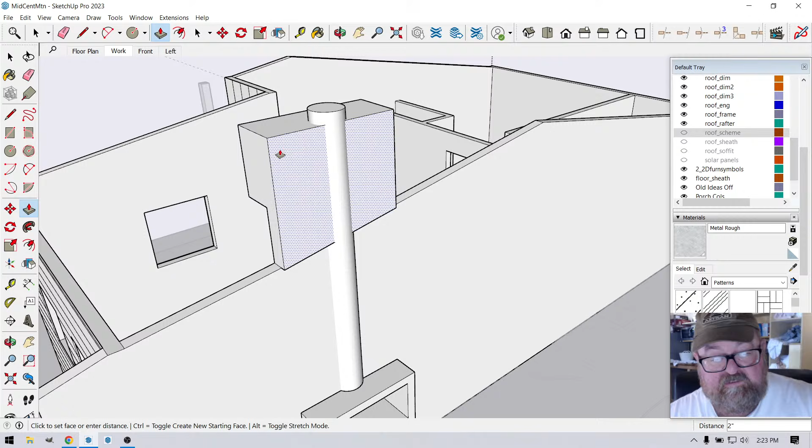Let's turn this off again. Let's see, I should have left, what I should have done was left this on there, then this comes back. Let's see, and then this comes down.

Looks like I got it a little too big, but I can adjust it. Turn the roof back on and then adjust it to fit this. I'm going to make this, I'm going to weld this up and I'll put screen around it.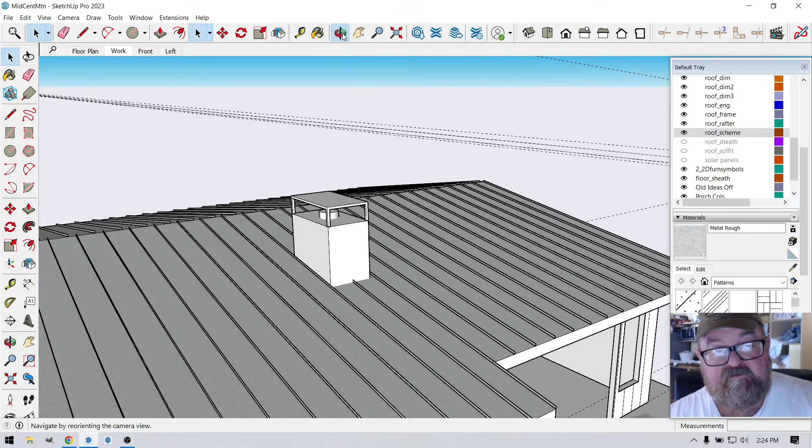Right. So that'll make it look like a, and I'm going to pour some concrete, probably pour some concrete panels to line that outside with. This may be my last house, so I'm going to make it cool.

Maybe killing over after that, after not too long. I don't know, I ain't going to live forever. But I want to have a cool house before, you know, for my last house. Then I can pass it on to the children when I'm gone.

So anyway, then I'll be able to sit in my office right here, turn around and look at the fire, or I can turn around and look outside. I'm thinking about putting a little window here.

The problem is I'm not going to have much of a place for a library. This is my only space. These are bookshelves right here.

So it's really not enough room. This is the only depressing thing. I can have shelves above my desk like I have right now. I have shelves right here above my monitor, got my book collection on.

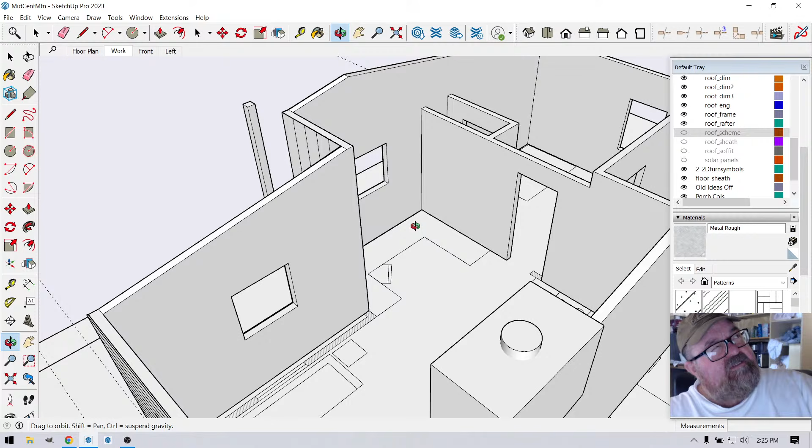My high school, is this the high school one? My building trades textbook is right here. This is literally my textbook from high school, my building trades class, right here. And so I started collecting them because I was going to start giving them to my apprentices. And I found the older version, which was 1978. No, I mean 1967, I think. This is, and the one I had was, the version I had was 1978.

And I think, so I'm collecting these textbooks from that same author. And if I ever get Artisan School of Construction and Philosophy going, I've almost got the website finished, but that'll be the textbook we use for the apprentices.

Anyway, oops, did I click the wrong button? Let's get rid of this. I didn't mean to turn that on. I meant to go here. So, anyway...

I could have just built this thing from the schematic drawings, but like I said, I wanted to have just a little better idea of the materials for this job because of all these sloped walls, you know, just to help me. I don't want to just randomly get 100 12-footers and 150, you know, although that's probably what I'll end up doing. But at least this way I can say, from here, I can pick out these zones. You know, that's what I'll do.

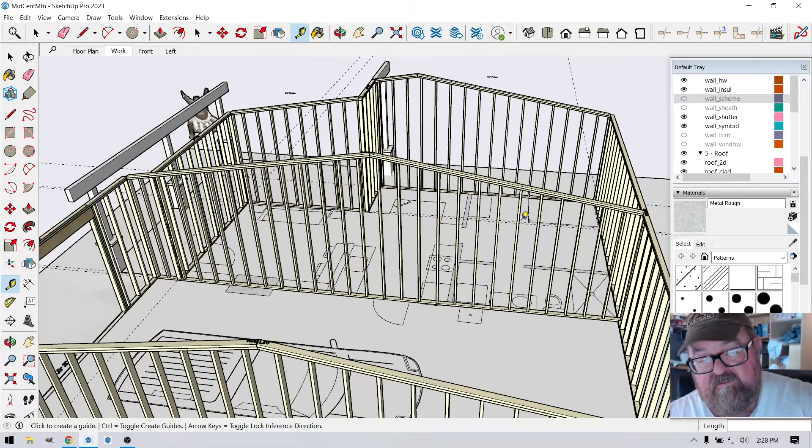But the main thing too is when I'm going to use this as a guide for cutting these studs, it doesn't really matter as long as I remain consistent. It doesn't really matter if they're perfect or not. I don't mean to say perfect.

As long as... normally what we'll do is figure out, let's see, so we know that the roof pitch is 2 and 12, right? So every 12 horizontal inches it rises 2. But there's also going to be a number, like if we measured this stud, it's 8, 10 and 5/8, and this one's probably going to be 9 foot. Yeah, 9 foot 1 and 5/16.

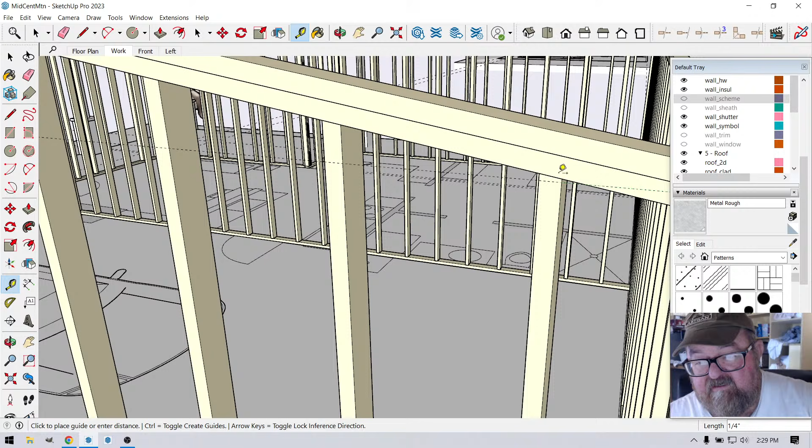So if you figure out that difference between those two, well, we can do that easy enough. We can just draw a line from there. Get up there, I'm trying to get in on that short point. And then we just measure. It looks like it's like 3 inches. So 2 and 11/16. Right? So then from that one to here, it's going to be 2 and 11/16. You see, so what you can do is...

If you're the saw man - when I first started on a crew, I was like 18, I graduated high school when I was 17, so I started a framing crew when I was 18 - I would just tell the guys, what's the first stud dimension? They would tell me, and then I would figure out the difference, and I would just start cutting studs, adding 2 and 7/16 or whatever it was to each stud until I got a stack. We just stack them in order. So as long as you keep with that same scheme on all these walls...

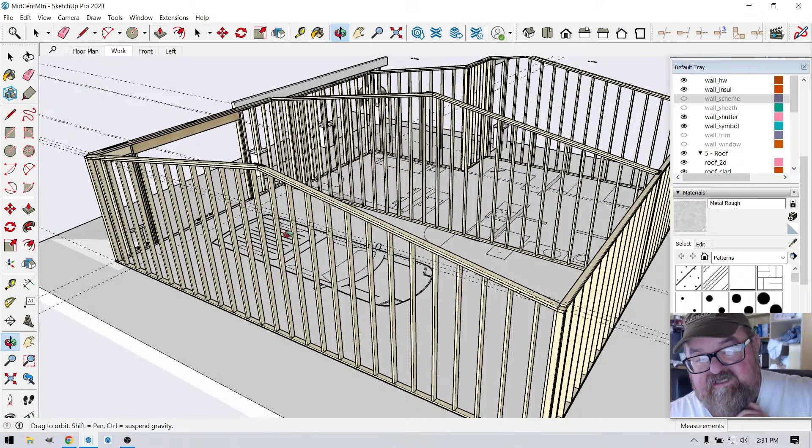They'll all line up with each other down through there. It's a little more time, but the investment in building these gable walls instead of building them straight is worth it. Because the tendency you have is to do the easy thing first, right? The easy thing would just be to build all these walls 9 foot tall out of 9 foot studs, and then say, oh well, we'll just frame up the little... You're in the long run, you realize you're causing yourself more trouble.

And literally, these walls don't have to have 2 top plates. This is what I was going to mention too. You only need 1 top plate for these non-load bearing walls, and I'll show you why. Where is the top plates? Top plate quantity 1. Because this gets nailed up to the bottom of the house line rafter.

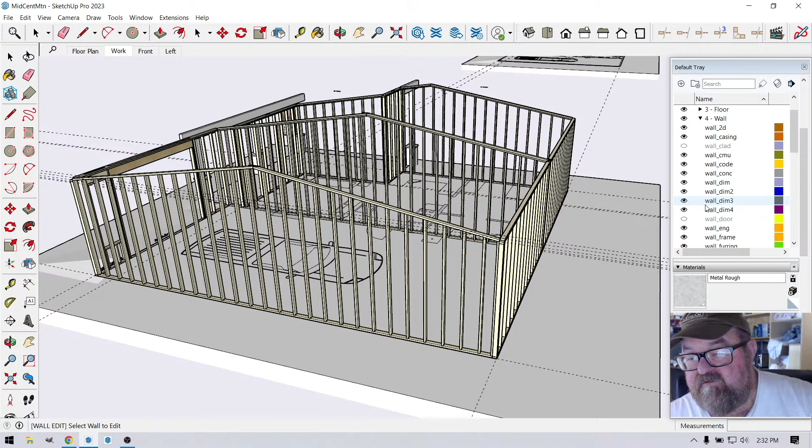Alright, so if we turn on the roof now - roof rafter, roof framing. I'm going blind, I can't see. If we turn... did I turn it off? What did I do? Did I delete the whole thing? It should be under roof, roof framing. What did I do? Oh, okay.

So if I turn off this, if I get rid of this for a second - this one, you'll see they got this rafter here, it's not right. We wouldn't use a 2x4 for that rafter. You have a house line rafter that comes over here and sits right there. Actually, it sits out flush. That's why we call it the house line rafter, because it sits flush.

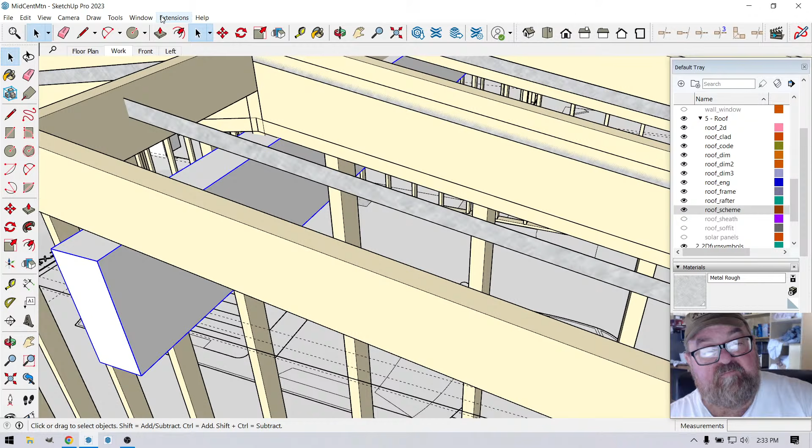And this top plate would come on over. But you see, that top plate gets nailed up to the bottom of the house line rafter. So there's no reason to have 2 top plates there. It's a non-load bearing wall. The load on the roof is on this wall and on this beam, which you just reminded me that we'll have studs under that beam, more than 1, and this beam will come up and sit right under the rafter, just like that.

We'll just stack 3 or 4 2x4s under that beam right there, and it'll do the same thing on this wall. There'll be 3 or 4 studs under it, and out here on this other end there'll be studs right under the beam. That's the support system for the roof.

These walls are non-load bearing. It's only the walls that your rafters are bearing on that are the bearing walls, and then your beam. In this case we have a ridge beam, so that beam is carrying the load to each of the points that are supporting it. We won't have this up here. This ridge board won't be there because we won't need it.

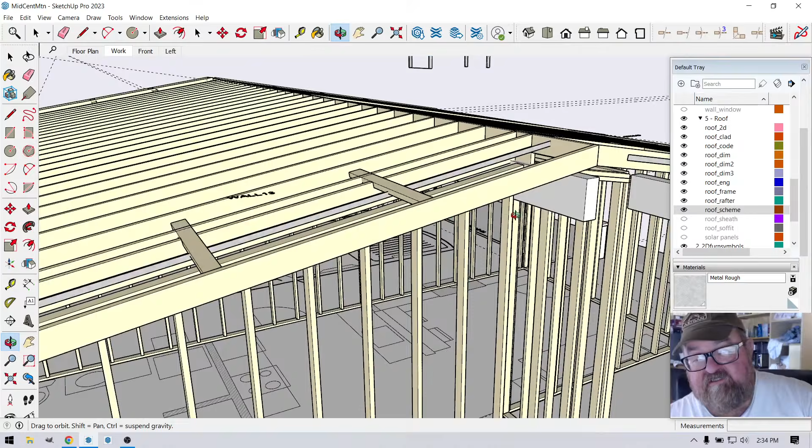The rafters will just butt into each other. The reason I'm doing that is because I like this look of where it sticks out on the end, and the rafters will be the same on the ends. These smaller barge rafters will be the same as a regular rafter.

So they'll sit on that beam too. And I got to get all this stuff perfected, but I'm not going to worry about it right now. What I want to do is I'm kind of doing this in phases.

I'm going to pour this slab in the next couple of weeks. That'll be fun. I got to get the plumbing roughed into the slab, and I'm going to video all this. I'm going to document the crap out of this house just for the fun of it. I'll probably create a little book about it, and it's going to look better, I think, in real life than in the drawings, which is what you want, obviously.

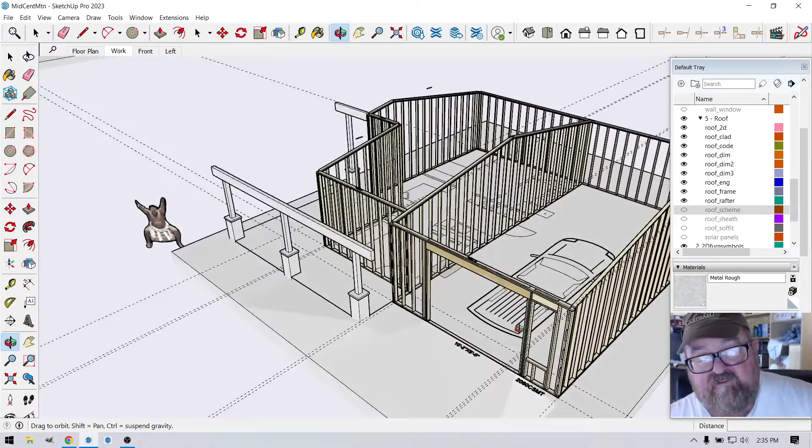Anyway, I've been going a long time. Let me see if there's any comments or questions. Oh, what do we got here? Tony, when you get a chance, okay. Warsaw. T-Car, hey T-Car.

Hope y'all are doing good today. What time is it? Yeah, I gotta do something at 3 o'clock, so I have to go. But I'm gonna be continuing to work on this. I'm excited about it.

I got a lot of work to do on that, but this is my little finished schematic version, and I'm excited. Again, I could just build this from this version, but I really wanted to give Paco, my framer - or me and Barrett may end up framing some of it - a good guide to go by when we get ready to start framing it.

Because of all the different wall heights and stuff, just to have a little guide to go by. I don't want to do too much thinking. When you start framing, you really just want to frame. You want to do all your thinking before, because I've been there before. I used to go out and set up my little office on the job, and it would kind of annoy Paco a little bit because I'd be wanting to do some thinking while he would always be like, 'Oh no, don't start thinking.'